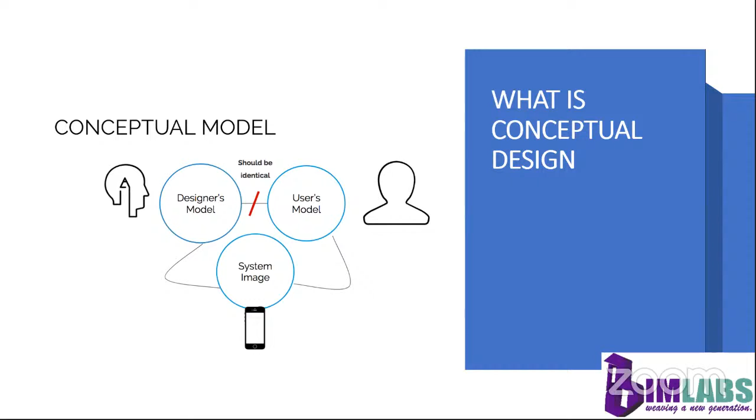What is conceptual design? Conceptual design is an umbrella term given to all forms of non-aesthetic design management disciplines. It is the early phase of a design process in which the broad outline of the function and forms are articulated. It includes the design of interaction, experience, process, and strategies. It involves an understanding of people's needs and how to meet them with products, services, and processes. Common artifacts of conceptual design are concept sketches and models.

Since the emergence of design thinking as a vehicle for business and research development, many conventionally trained aesthetic designers have wrongly been called upon to support organizations with workshops pertaining specifically to business or process development, on the incorrect assumption that all design is equal in capacity. This has resulted in a large shadow being cast over the role of design in business development, and questions being asked about the value of design as a tool for business and research development.

This is the agenda of my session. In today's session, we discuss the benefits of conceptual design, computational versus conceptual design, conceptual design in BIM, conceptual design tools, FormIt, geographical locations, import artwork, materials, levels and layers, analysis, and export to Revit.

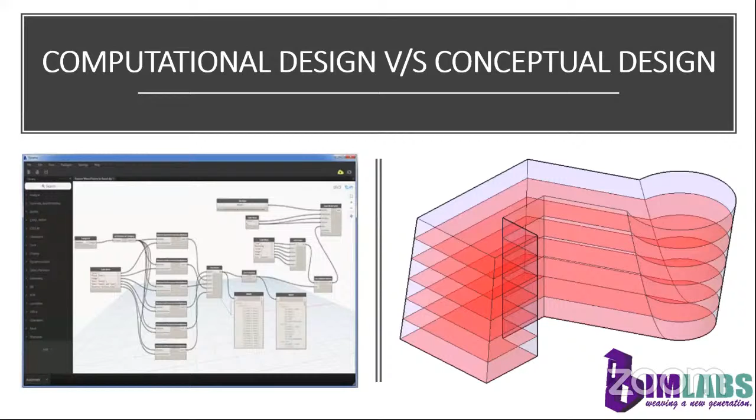Next, we have computational design versus conceptual design. Design research has generated many computational tools to aid designers over the years. Most of these tools are focused on either the preliminary steps of customer needs gathering or the steps of detailed design. The conceptual design phase has seen fewer computational tools, even though well-known methods are available, such as brainstorming, intrinsic and extrinsic search, and morphological analysis.

A generalized computational concept tool is presented to aid designers at the conceptual design stage. It relies on storing and reusing existing design knowledge to create new concept variants. The concept variants are computed using matrix manipulations. Essentially creating a mathematical matrix, the concept generator produces quick concepts that can be used for concept selection or as a basis for generating additional concept variants through non-computational creative techniques.

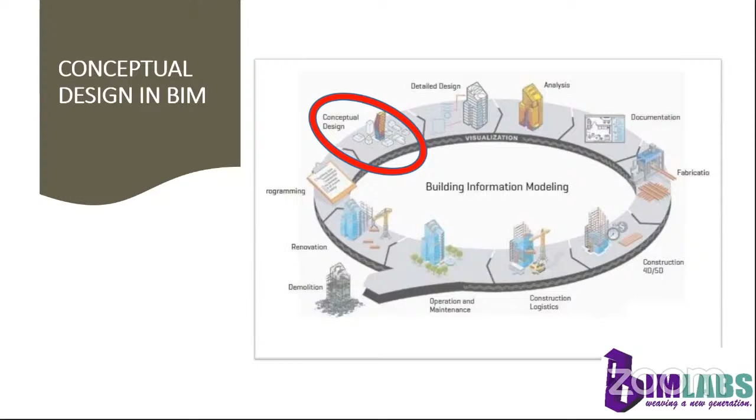Next topic is conceptual design tools. Mainly we are using SketchUp and Autodesk FormIt software for conceptual designs. SketchUp is a 3D modeling computer program for a wide range of drawing applications such as architecture, interior design, landscaping, civil, and mechanical engineering. Next, FormIt. FormIt is a powerful BIM tool. FormIt is an architectural concept design software. It performs conceptual-level energy analysis with Insight. It also creates computational models with Dynamo.

FormIt is a 3D sketching tool for the conceptual design phase. This software is easy to use and to understand the concept. It can build complexity into your architecture modeling process anytime, anywhere, to make informed decisions earlier in the design process with site context, solar impact, and energy analysis. It can optimize our design process and can connect conceptual design to the BIM workflow with native Revit integration and cloud access.

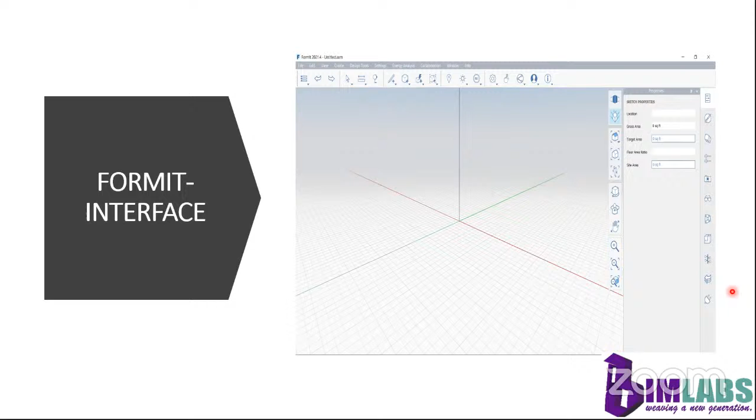Next topic is geographical location. To accurately analyze your design, you should define the geographical location of the sketch using the location feature.

Setting the location is important when you want to use building performance data while designing. Click on the location icon from the menu bar.

You can either search for a specific location or use the map to browse for a location. Click to place the red pin after you found the location. Click Import Satellite Image to add the aerial photo to your sketch.

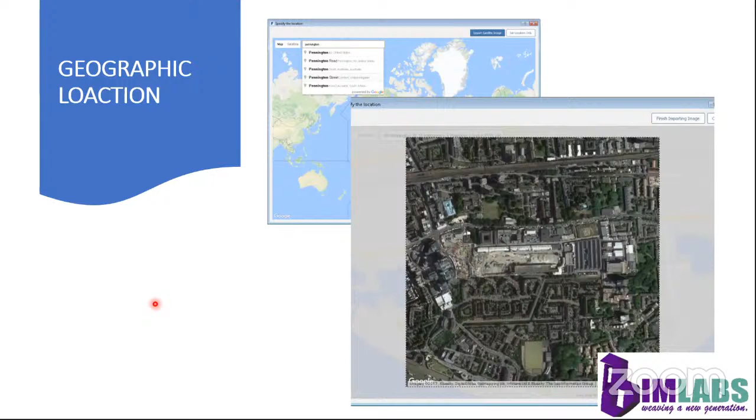Using this dialog, crop the satellite image to show the relevant content of your sketch. Click Finish Importing Image to import your satellite image to your drawing space. Next, we have Import Artwork.

If we have a drawing or image of the work, we can simply import the image from Files, select Import, select Locally, select the image location, and import our artwork.

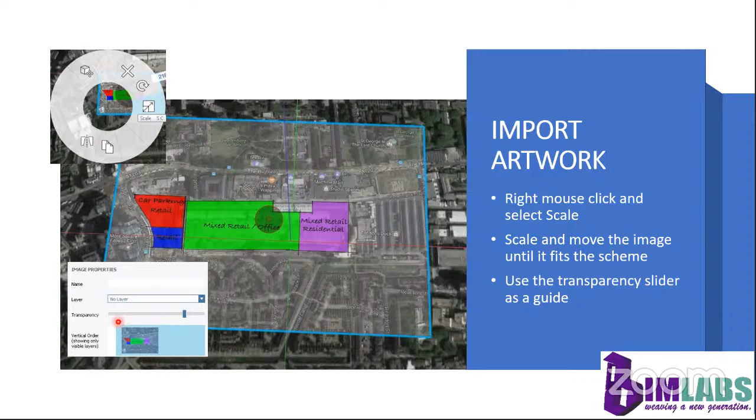After importing, right-click and select Scale. Scale and move the image until it fits the scheme, and use the Transparency slider to adjust the transparency of the image.

Next topic is modeling. After setting the image, use the modeling tools like line, arc, rectangle, etc. to first define the building footprint. Then use push or pull to drag the building height, and we can specify the dimension of the height here.

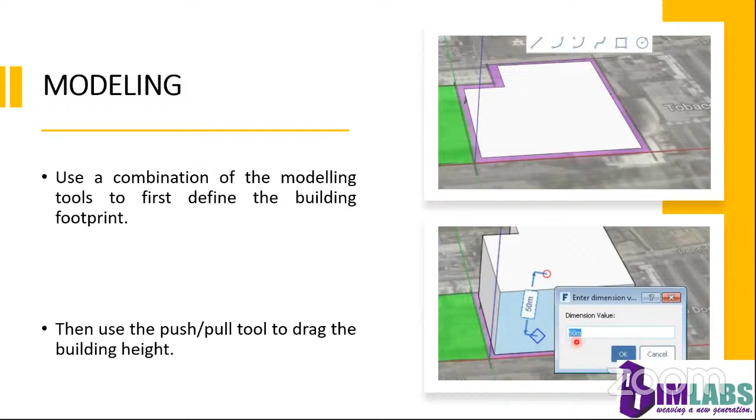Next, we have Group. Group is a tool that combines different elements together, including edges, faces, solids, etc. Double-click to select the object, then right-click and select Group. Grouping is important if you want to take this through Revit as a mass with mass floors.

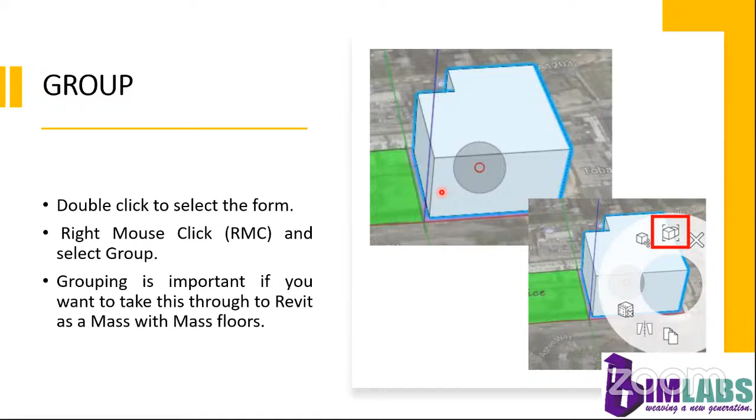Right-click to select Edit Group, where we can add a name and category to the group, then select Finish Group Editing.

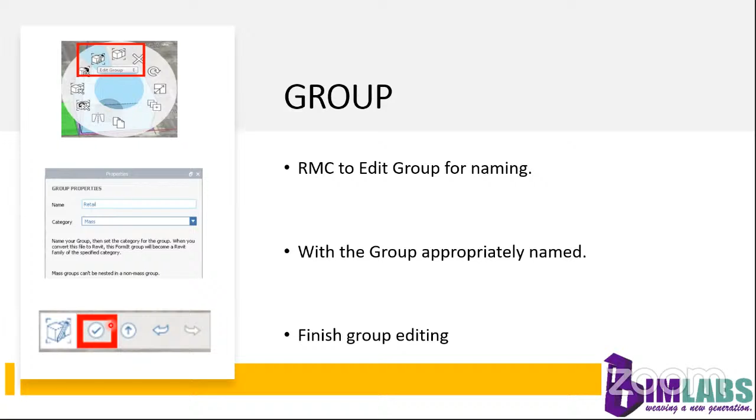Next topic is materials, levels, and layers. In materials, we can choose different material for our model. From the palette, on material, select material. From there, we can either add from the samples or import the material and apply it to our model for realistic visualization.

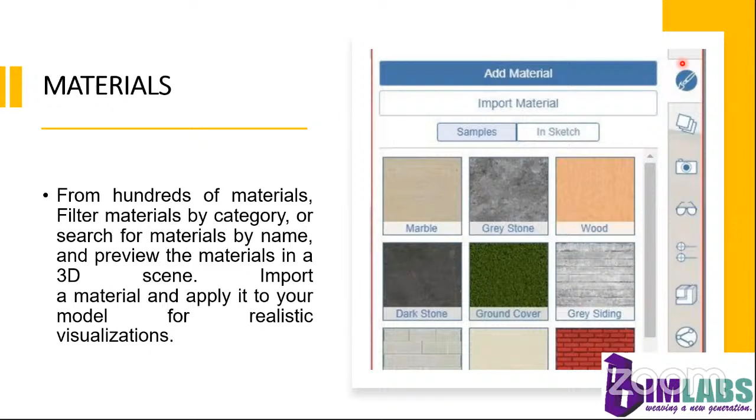Next, we have levels. We can apply level to indicate the floor elevation and to generate area calculation. To create different levels, select the object from the group, and from the Properties palette select level. With area by level turned on, select the level to choose what level to apply to the selected object.

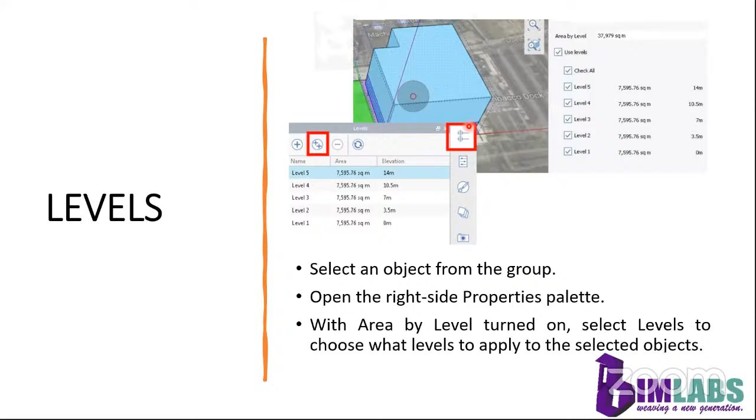Next, we have shadow analysis. A shadow analysis can help determine the area of the model that will receive less sunlight or remain in shadow during a particular time of year. To perform shadow analysis in FormIt, go to Sun and Shadow. Here, turn on the shadow option and adjust the date and year, and notice the change in the shadows. We can see different shadow positions based on different time settings here.

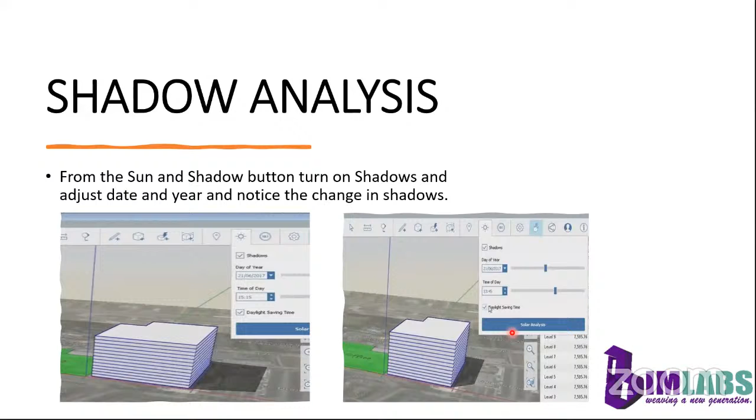We can also select solar analysis from this tab. We can analyze the amount of solar energy in a particular area of the building. For that, in shadow analysis, select solar analysis, select the face of the object, and click analyze. Here, we can see the different values of solar energy on the different faces of the building, represented in watt-hours per square meter.

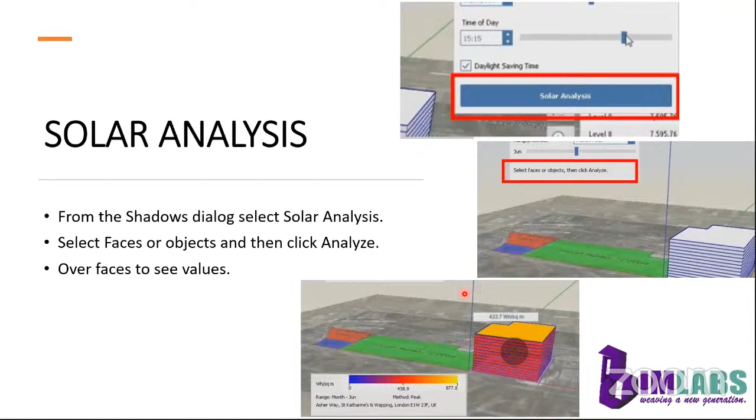Next, we have Insight analysis. Insight analysis is an energy analysis where we can get the energy distribution of the building and also calculate the cost. For that, go to the energy analysis option and select Generate Insight. We can view the insight by clicking the link to browse to insight360.autodesk.com.

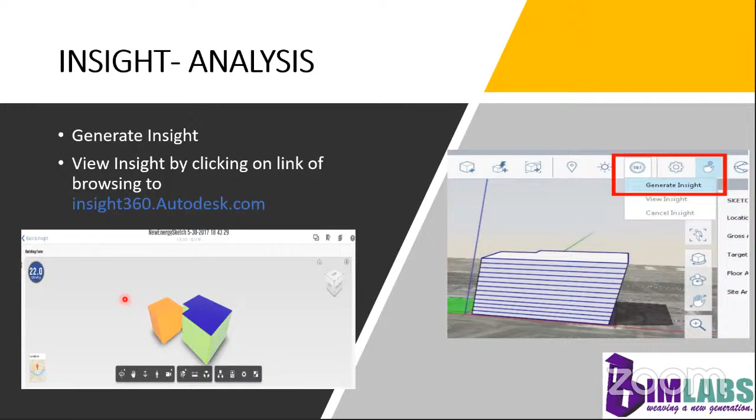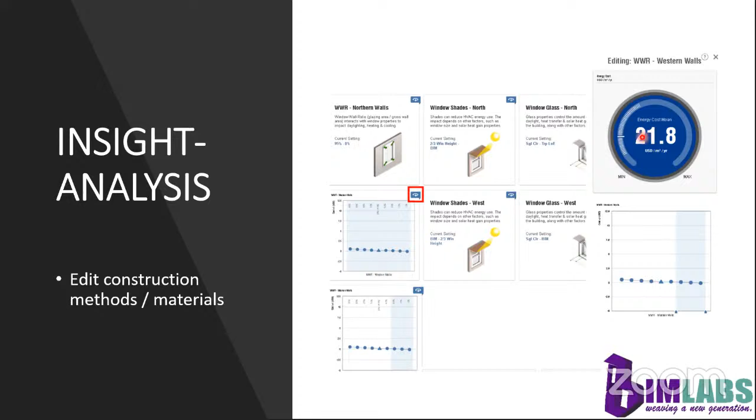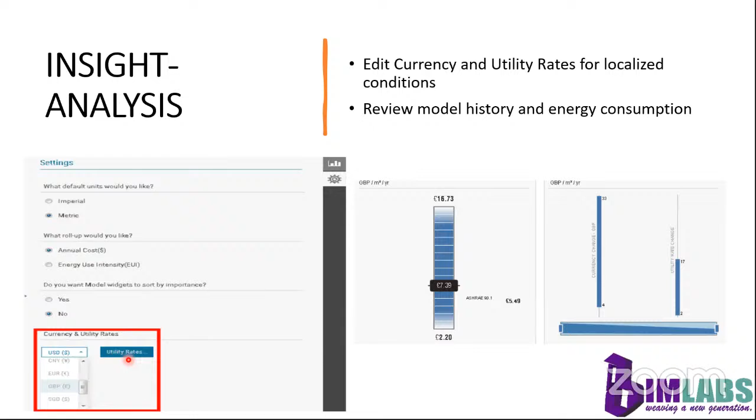We can also edit the currency and utility rate for localized conditions here. We can select our currency and utility rate from this option. Thus, we can review our model's history and energy consumption.

Next topic is export to Revit. To export the FormIt file to Revit, first we have to save the FormIt file in a specified location. Then open the Revit software, go to the Add-ins tab, and select Import FormIt to RVT format. Choose the FormIt file location and import it to Revit.